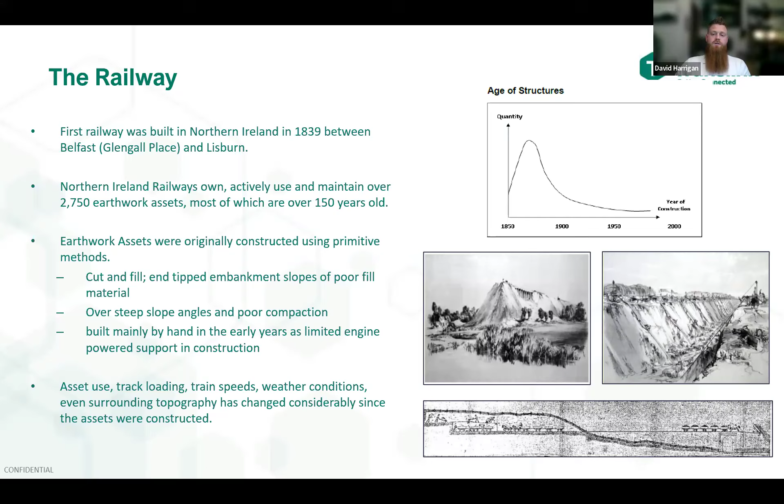Asset use, track loading, train speeds, and weather conditions have all changed since the original earthwork assets were constructed. Excavation of slope toes has taken place to realign track, reduce curve radius, or install new signalling equipment. Embankments have been raised to improve rail condition, and construction works by third parties at the crest of cuttings and toes of embankments has all contributed to changes in the earthwork asset base.

Northern Ireland Railways define an earthwork as an embankment or cutting with a level difference from crest to toe of greater than 3 metres. Northern Ireland Railways are the second largest earthwork asset owner in Northern Ireland, behind DFI roads, and we are responsible for 171 miles of earthworks. Approximately 40% of the Northern Ireland Railways network runs on or in an earthwork asset.

There are 2,751 individual earthwork assets within the company's earthworks portfolio, and you can see in the slide a breakdown of the asset types we maintain on the network. We have approximately 90 rock cuttings, and the remainder of our assets are spread pretty evenly between soil cuttings and embankments. Asset types within the portfolio varies.

We have large natural soil slopes, like those at Cloghan Point, large man-made soil cuttings in Craigmore Cutting, which leads onto the Craigmore Viaduct at Newry. We have low floating embankments over peat bogs at Adavoyle, natural rock slopes at Downhill, as shown in the image, and man-made rock cuttings within Wellington Cutting, right down near the border.

Northern Ireland Railways as a company must deliver a high-performing, safe and reliable public transport system, and we have to do this sustainably. Translink must ensure the safety of passengers and services at the lowest whole life cost and reduce the impact of extreme weather on railway infrastructure.

The management of earthwork assets in the railway environment presents unique challenges. Track access is limited due to the operational timetable, and it requires significant planning to view and examine assets. Our network assets cannot be easily and economically replaced, and the age of the assets and limitations of the railway corridor has a significant effect when applying current design codes. There are also uncertainties associated with variable construction materials and methodology used in the construction of the historic embankments.

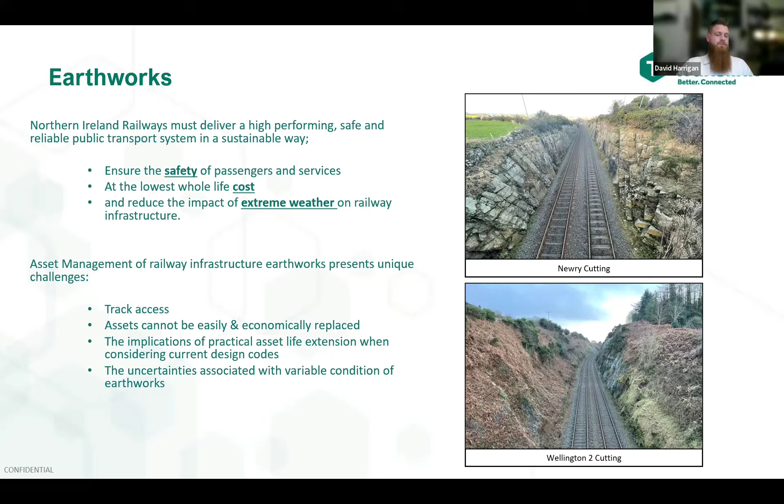Northern Ireland Railways' annual budget is funded by revenue for maintenance works and capital investment for improvement schemes. Annually, earthworks and drainage spend in the region of £2 million carrying out maintenance works and examinations. Our annual capital expenditure is generally in the region of £5 to £10 million, and listed below is a few of the earthworks and drainage projects we are undertaking at the moment.

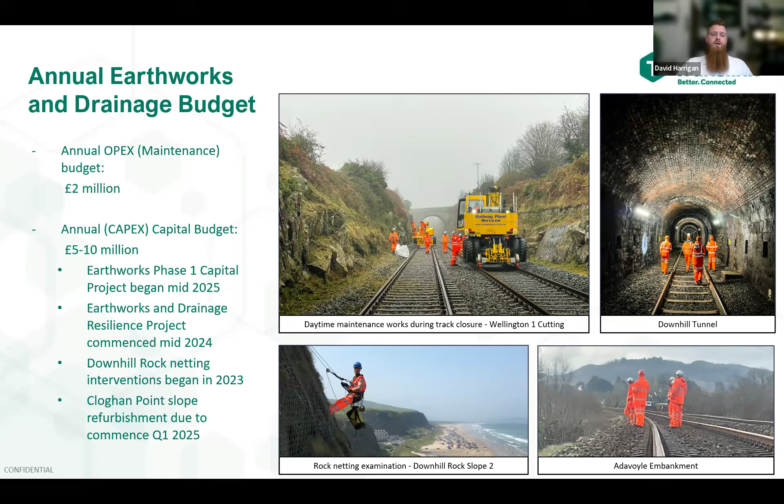This list includes the Earthworks and Drainage Resilience project, which you will hear me refer to a lot when I move on to the next few slides, as the core deliverable of this project is to locate, map and condition assess all the drainage assets on the entire railway network.

Historically, within the railway environment, drainage assets have been considered a secondary or child asset, there to support the function of the main assets such as earthworks and track. On the Northern Ireland Railways network, just like other major rail operators in the UK, the drainage systems have been historically underfunded, with maintenance and improvements being carried out as a reactionary measure to address flooding incidents, with limited proactive investment. Interventions, when carried out, have historically focused on the failed asset without consideration for the wider drainage system.

Recent incidents on rail networks in the UK and Europe have prompted a shift in philosophy to consider drainage assets as a primary asset. As mentioned, we are currently undertaking a project called the Earthworks and Drainage Resilience Project. This project is primarily focused on the collection of drainage data across the entire network. The project commenced in mid 2024, and the main focus of the project is to locate, georeference, and examine the current condition of all drainage assets affecting the Northern Ireland Railways network.

To facilitate this, we have developed a bespoke drainage app and upgraded our existing Earthworks database to store and retain drainage asset data alongside our existing Earthworks data. Development of the drainage database adjacent to the Earthworks database is in line with Sir Lord Mair's recommendations following the Carmont incident, and we are one of the first rail operators in the UK to hold this data within one database. The relationship between earthwork assets and drainage assets is considered fundamental to the success of the project.

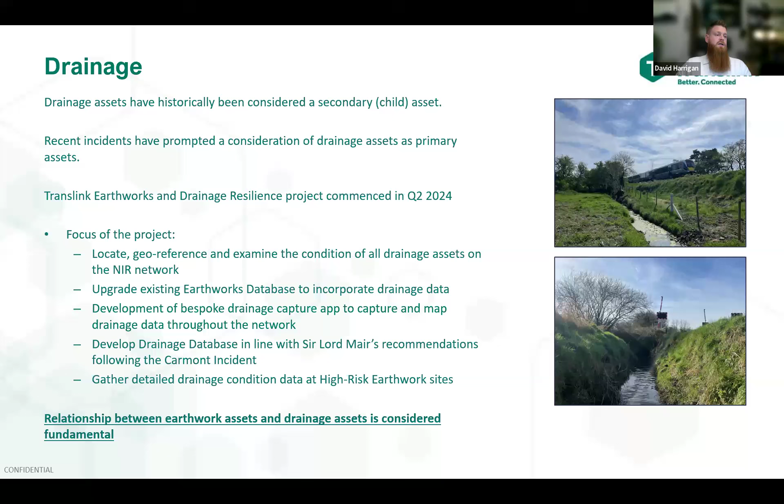To date, updates to the Earthworks and Drainage database and data collection systems have been completed, and we now have a fully functioning Earthworks app, Drainage app, and integrated Earthworks and Drainage database. Aerial LiDAR surveys of the entire network have recently been carried out and incorporated into the database. We have utilised this to identify previously unknown earthworks assets and will be examining these during the upcoming earthworks examination season. We have currently covered approximately 22% of the network and identified over 7,000 drainage assets.

This is increasing daily as we have 2 teams out gathering off-track data every day and 2 teams out gathering on-track data every night. A drainage maintenance plan and schedule has been produced based on the information to date, and we have already begun to carry out proactive maintenance activities on poor condition drainage assets in high-risk areas of the network. We are also working to develop drainage renewal and refurbishment plans.

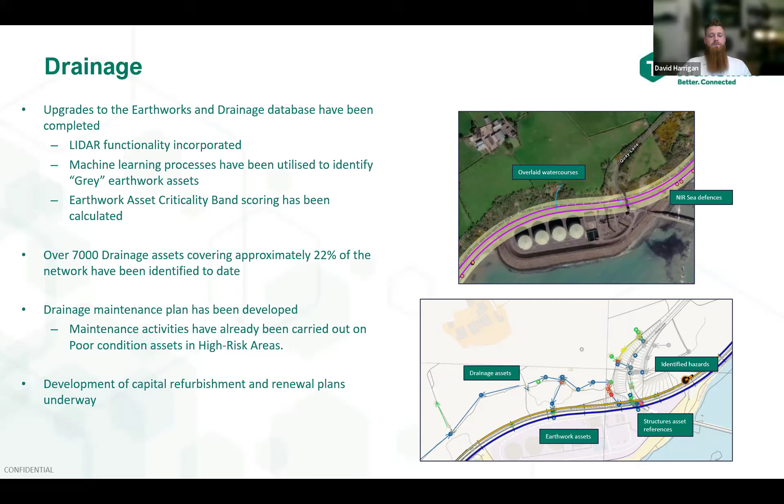on the earthwork assets. Amey Consultant provide trained earthwork examiners, and Adman Construction provide track safety teams, rail-mounted plant, rope access operatives, and railway qualified personnel to facilitate track access for examinations and to carry out earthworks maintenance activities. We generally have an earthwork maintenance team on track every night from October to February, and our earthworks examinations are carried out during the low vegetation season between November and February.

For the duration of the ongoing Earthworks and Drainage Resilience project, these teams operate under a project manager in our renewals department, but these teams will migrate to the Earthworks and Drainage team following the conclusion of the project.

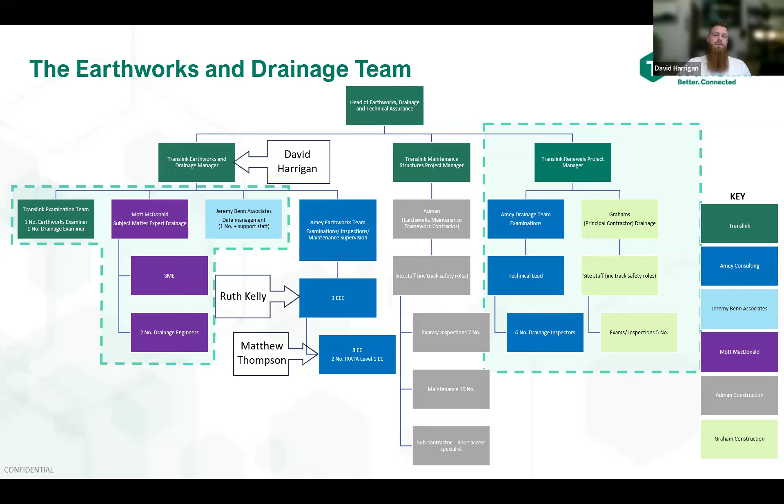Translink have competency requirements for members of the Earthworks and Drainage teams who examine our assets. These competencies are based on Northern Ireland Railways Competency Management Framework and current industrial standards. We review the competency of all examiners annually, and our mentoring scheme is utilised to maintain examiner competency.

An example of the competency required for an earthwork examiner qualified to examine a rock slope asset is shown on the slide. The requirements for examining rock slopes includes attendance at a week-long rock slope hazard index course in Scotland. Some of our earthworks examiners also hold IRATA rope access certification to facilitate examination of rock slopes while suspended on ropes. I'll now hand over to Matthew, who will talk through the earthworks examination process.

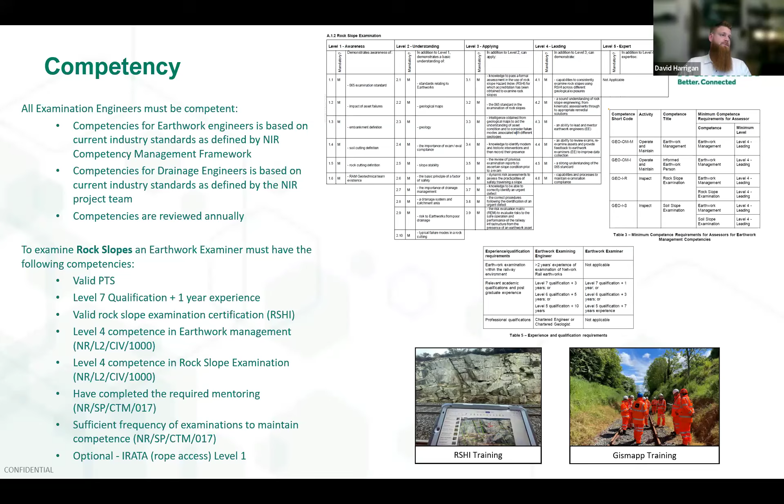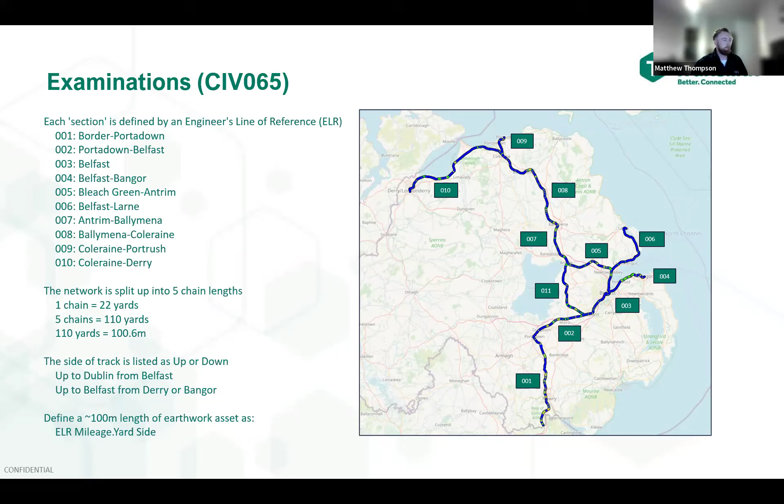Cheers, David. So just before we touch on the examination process, let me explain how we reference the assets uniquely across the network. The NI railway is split up into 11 sections, and each section has its own unique engineer's line of reference from 1 to 11. Within each line, it's broken down into miles, half miles, quarter miles. But for our assets, each earthwork is broken down into a 5 chain length, which is approximately 110 yards, and also the side of the earthwork, either up or down.

So we carry out our examinations in line with CIV 65, and this standard provided by Network Rail sets out the data required to complete an earthwork examination, and also provides the algorithm to calculate the risk that earthwork poses to the railway. We complete our exams digitally through an app called Gismapp, created by JBA.

So the first step of an examination is to identify the type of the asset - that can be a soil cutting, embankment, or rock slope. Typically it takes 10 to 15 minutes to complete an examination, and these are usually carried out from track level.

So the first exam we'll have a look at is the soil cutting, and these are probably the most straightforward to carry out, as you have good visibility from track level of most of the features of the earthwork. Initially you'd be looking to capture the max height of the earthwork, the gradient of the slope, whether there's change in gradient from crest to toe as you move down the slope, and other major things you're going to capture - existing remediation measures such as soil nailing or toe retention.

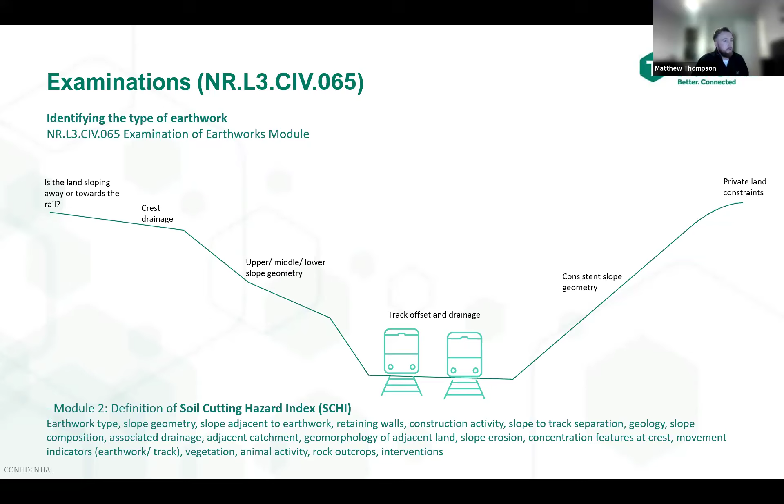Also the track offset from the toe of the earthwork. What's also important is to note any sort of movement indicators, either historic or more recent, such as toe slumping or slope erosion.

Some of the issues we have in carrying out exams in soil cuttings particularly is the exam requires input of the wider catchment area, and if it slopes away or towards your asset, and this can obviously be difficult to see from track level, so it's best to get a feel for the lay of the land before you're within the cutting.

There's also the issue of heavy vegetation on the slopes, which can obscure them, and the examiner has to make the decision - can they see enough of the slope to assess the risk appropriately, or do they require to leave the exam unfinished and come back at a later date once devegetation has occurred. There's also the option to complete the exam with it left heavily vegetated if the examiner feels that it's a low risk asset. And just some other examples of the sort of features we would pick up.

You can see there, if the examiner felt they did need to go off track to view the asset better, there still might be restrictions around actually gaining access to crest level just with security fencing.

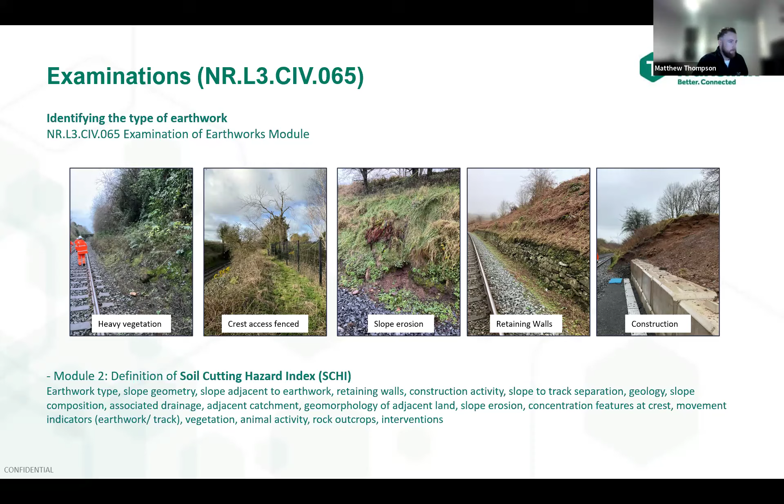And across the network, there's a number of different types of retaining walls. Here's more of a historic rubble wall, which you usually typically find around the Newry cut, and then a more modern modular block wall. And that example of the modular block, during exam, we would capture that as a construction activity as it's still ongoing.

And ideally, you'd want to come back at a later date when the works have been completed to capture the as-built version of the earthwork.

Now if we're going to look at the embankment exam, it's quite similar to the cutting in the sense of what you're required to capture to assess the risk. But some of the things that are more tricky with embankment is, as you're typically at track level, you can overestimate the gradient and the height of the earthwork, just given your perspective.

There's also requirement to capture any drainage, and most of the sub drainage is signposted around the network, but it's one thing knowing it's there, but getting actual eyes on it to assess the condition is another thing.

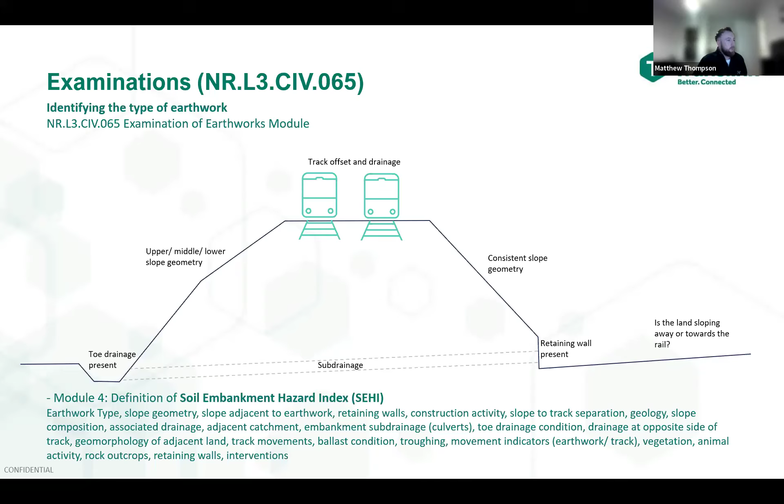And again, as with the cuttings, you look at recording any movement indicators such as ballast loss down the slope, or even - a lot of the embankments are constructed over, not a lot, but some of the more high risk embankments are constructed over bogs. So you do have an issue with long-term settlement, and on occasion you can see dips in the track, particularly around culverts.

Just again, some features that we come across when trying to carry out an embankment exam. You can have flooding at the toe, which then obviously obscures you picking up the height of the slope and the toe geometry, and difficult to assess is that flooding caused by field drainage or no drainage existing. So ideally we'd like to come back to them assets at the dry season to get a feel for what the toe condition is.

There's also a lot of the embankments have oversteepened slopes, which obviously poses a risk to the track, but also if the examiner does feel they would like the slope devegetated prior to completing their exam, it does make that more complicated with the maintenance contractor having to make use of rope access specialists to clear a swathe for the examiner to get a feel for the slope geometry.

And then just an example of where we have embankments adjacent to water courses, there's obviously the toe scour risk, and again the examiner can't really assess the toe condition of the slope.

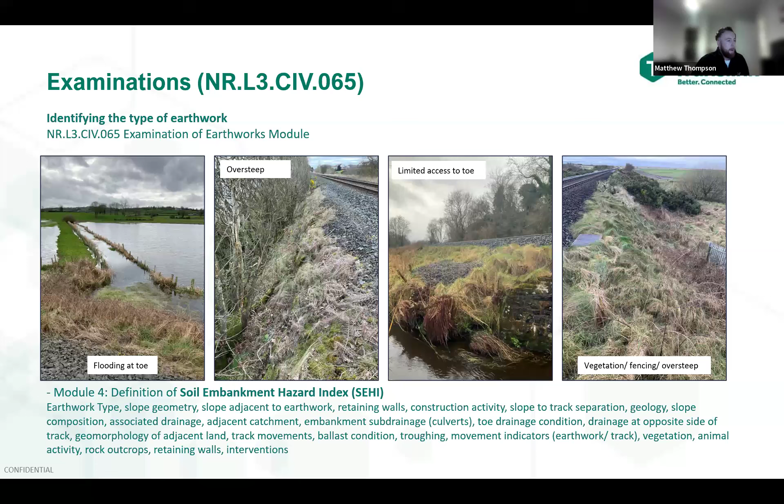So the next thing is the rock slope examinations. They're quite different from your soil assets, and as David said, you need to do a training course to properly understand what you're required to capture.

The main thing is you're looking at the rock mass characteristics. You're looking first to capture your joint sets, your bedding planes, and the spacing between these, along with the compass direction of the slope face.

The software can take this data and make an estimation of the types of potential failures that could occur. But alongside that, you also enter what your opinion is and what any potential failures you can see, be they planar, toppling, wedge, or ravelling failures.

Alongside that, you would also capture any groundwater flow through the rock face, and in some cases there may be a soil cut above the rock face, and the examiner would have to make the decision: do they feel that needs a separate examination if they feel it poses a risk standalone?

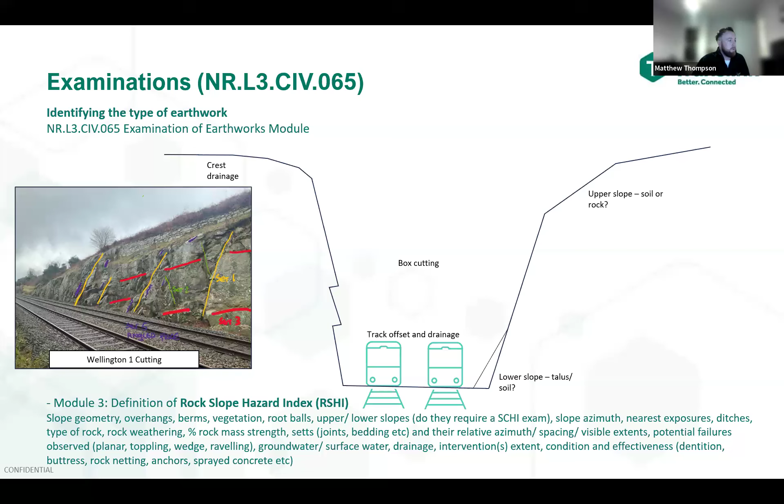And then across the network, a lot of the rock assets do have existing remediation, such as your dentitions, shotcrete, buttress, but the most common is the rock netting systems.

A lot of these have been installed historically, and the information on their design and their as-built condition isn't really there. The examiner is asked to make an assessment of the effectiveness of the existing remediation, which can be quite difficult when you're not 100% sure on the crest anchor depth or condition.

But I'll be going out next week to inspect a rock netting system on ropes that maybe hasn't been looked at for 10, 15 years. So that'll be a good opportunity to see how they're holding up.

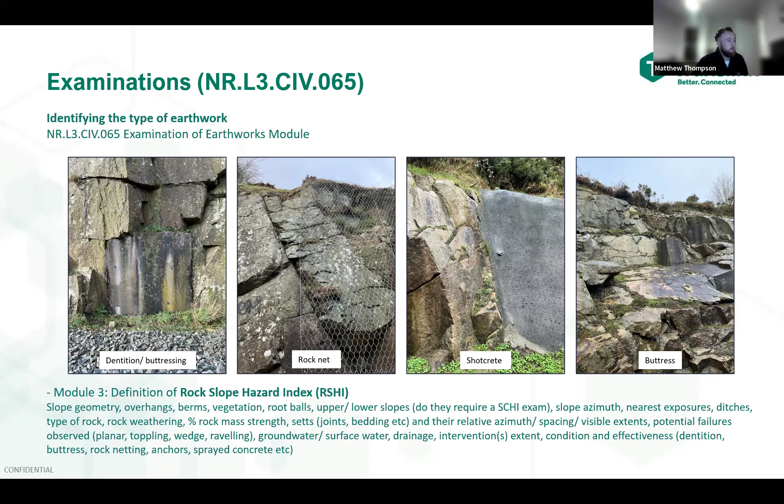So alongside the required information to complete an exam, the examiner also records what's known as a risk evaluation matrix. This sits outside the exam process and allows the examiner to give an opinion, either low, average, or high risk, on different potential failure mechanisms.

So you might have, for an embankment, the risk of a translational slip, or is there any detrimental vegetation, or the scour risk, just to give a second opinion, although the geometry and everything else you're capturing does give a good feel for risk.

It doesn't capture everything. There's also room for the examiner to just make general comment on the site condition, and also make recommendations for maybe things that don't directly affect the earthwork asset, but affect the overall safety of the railway, such as any structure defects you might see, or animal activity or blocked drainage, that can be flagged and passed to the relevant parties.

And also just generally for the next examiner coming behind you, any hazards that should be noted.

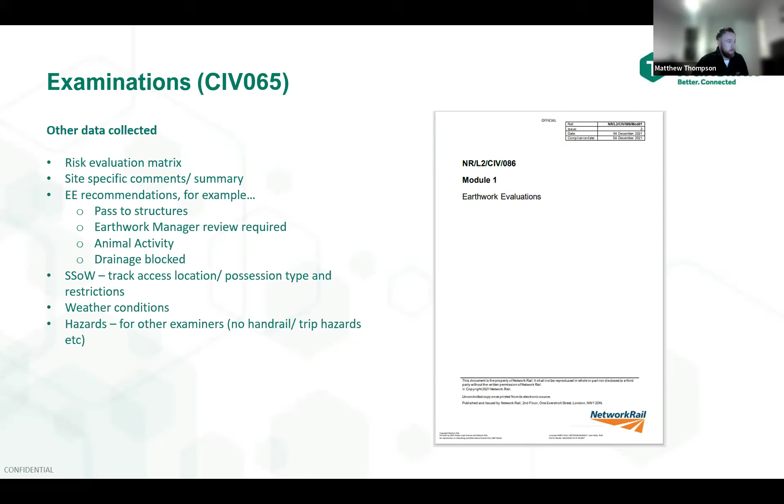So once you complete your exam, the system categorizes that asset within an earthwork hazard category, known as EHC, and that ranges from A to E, with A being the lowest likelihood of a failure and E the highest. This directly determines the frequency of that asset for further examinations.

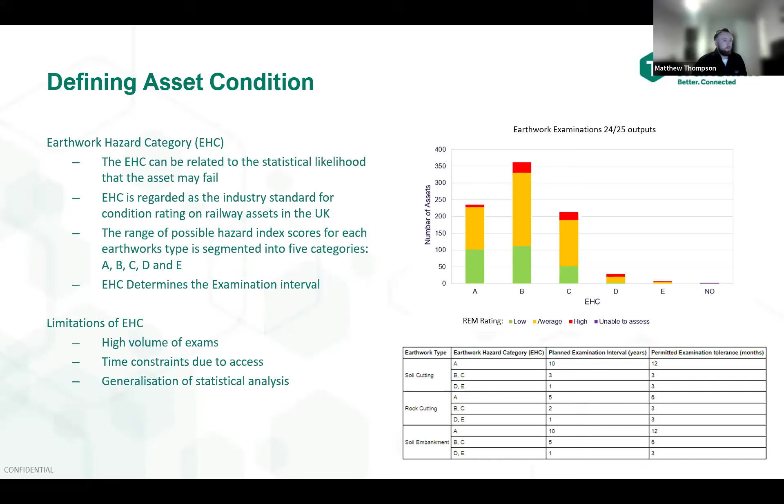So overall, there's three major classifications of the risk: your EHC which we spoke about, the risk evaluation matrix, which is the examiner's subjective opinion of the risk, and the overall earthwork asset criticality banding, which looks at the bigger picture — if a failure was to occur, how many lines it would affect the wider infrastructure, and that's something that Translink are working on currently to get a feel for the overall risk of failure.

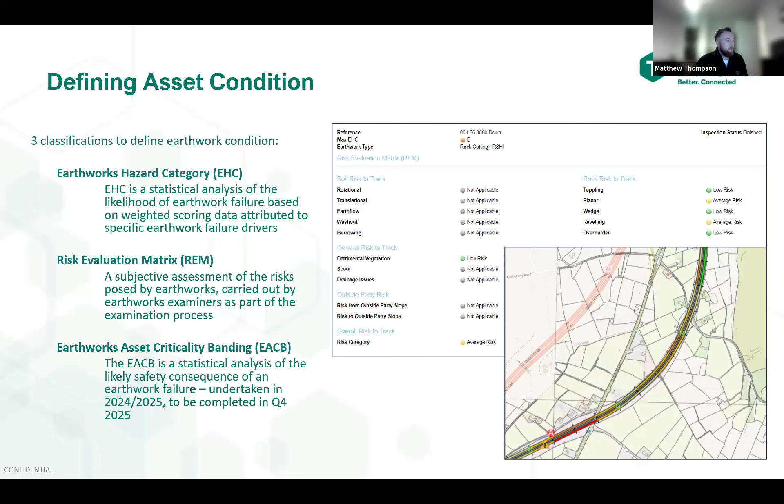So just looking at an overview of the assets we examine, there's nearly 3,000 in total, with the majority being embankments. But out of all of them, only 6 currently have an EHC score of E, the highest risk category. But out of those 6 classified as E, only 1 was considered high risk under the risk evaluation matrix system.

Whereas you can see EHC C, which would be considered your medium risk sites — 54 of them, subjectively, the examiner thought there was a high risk element to that asset. So you can't just solely rely on the EHC to predict failure or examination frequency. It needs to be looked at as a bigger picture.

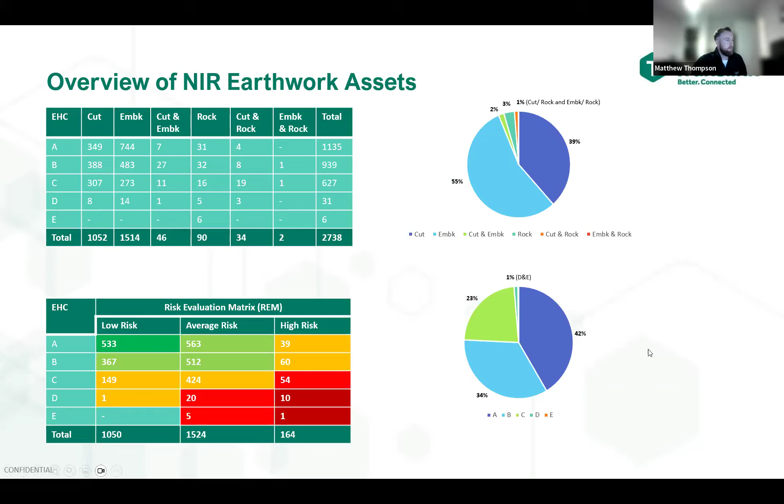Okay, so Matthew's talked through the exams, and I also undertake exam approvals. These are all carried out in accordance with Civ 65. There's about 800 exams on average carried out annually during the winter months, due to vegetation dieback. And as Matthew mentioned, the examiners carry out about 8 to 10 a day on average between running trains. It's all done on day shift, and where there are disruptive closures, we try to make use of the examiners on these to make progress.

Every year there's a small percentage of incomplete examinations. Some aren't approved, some will require further vegetation clearance and weren't able to be vegetated during the season. They're too obscured for the examiners, or they're inaccessible. A few have also been due to just issues with the software and on the network.

I also refer to some of the outputs as generic admin outputs - assets that are going to be removed, which are less than 3 meters in height and are low risk. Assets added to the register that weren't previously captured, and David mentioned the LiDAR picking up some of these areas for this year, or amendments to asset types that have been previously recorded. We also have recommendations made by the EEs outside of that risk evaluation matrix. They also have independent commentary that they put in on each asset, and some of those form part of the earthwork maintenance schedule. There's a few ways that maintenance schedule is built up, which we'll touch on.

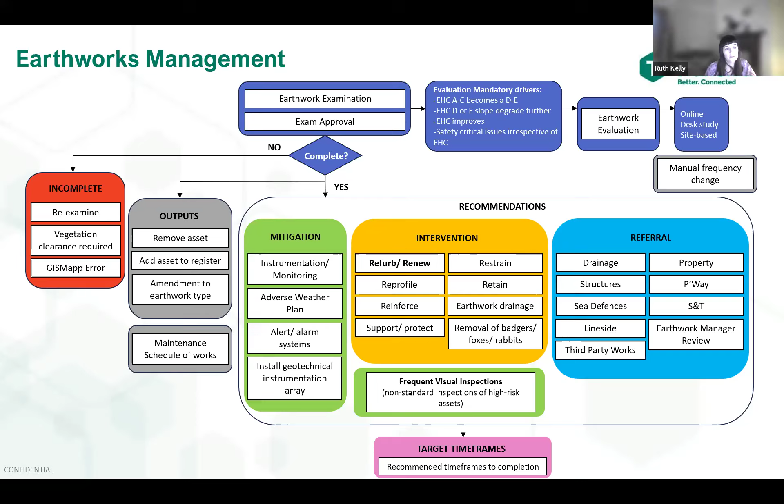So the recommendations this year came with target timeframes to enable the client, Translink, to plan budget requirements for proposed maintenance or capital works upcoming. As well as this, Amey also provide emergency on-call consultancy to Translink, which includes earthwork incident support in accordance with CIV 185. So hopefully that paints a picture.

I know it's a bold slide, but it paints a picture of where I'm going with the rest of this presentation. I'm going to cover some of the interim mitigation measures, and then I'll touch on some of the intervention works that we've been involved in with Translink over the last few years. In particular, I'll touch on maintenance, some emergency works, and some refurb renew.

So I mentioned the inspections, visual inspections. Prior to Amey joining the maintenance contract, these were paper-based records with local changes on the ground, all on a 2-month frequency. Following the first few rounds of inspection, we digitised all the records. We worked with Translink and JBA to develop a tab within GISMapp so that we could georeference all the photos and the records. And what was important was maintaining the same staff on each section of track to allow them to visually inspect change and to gain familiarity with the assets.

So we've since recommended alternative frequencies for assets based on findings, and we continue to review the frequency. We add and remove items from the scope where required on agreement with the earthwork manager. The high risk assets are on a 2, 4, 6, 12-month visual inspection, and it's important they sit outside of CIV 65 exam frequency. You'll see me mention one of the renewals at Gora. It previously was on the list, and since it has been upgraded, or there's been a renewal and remediation installed, that'll come off the visual inspection list.

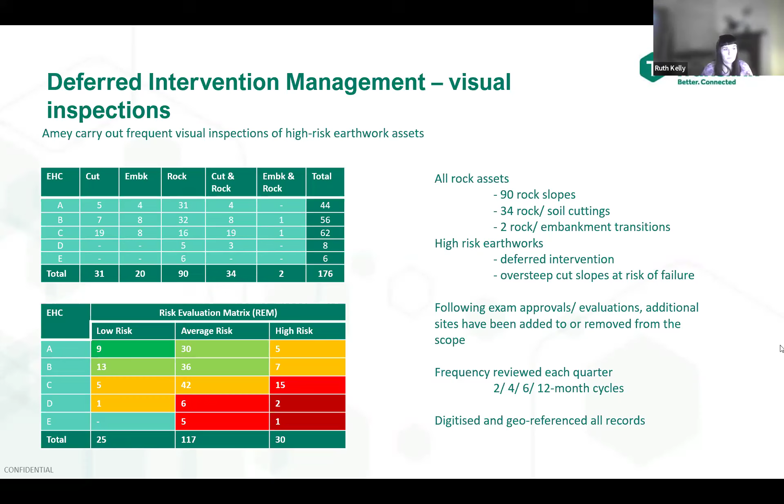But we have worked with Translink to build up, every 12 months, we will go visit all of these sites just to build that maintenance schedule. So any debris that needs released from the rock netting, any patch repairs required, any devegetation required, these are built in to the end of the visual inspection schedule each year.

So Translink also have an adverse weather risk management plan. There's been 11 named storms back in winter 23-24. Translink had significant issues on the network, especially for that earthwork asset portfolio, following Storm Ciarán in particular in October 23. We have been involved in 10 emergency earthwork interventions since October 23, and Translink themselves have an adverse weather plan which covers their vulnerable sites for earthworks.

They focus on assets that would be at risk of inundation of surface water, assets that would be vulnerable to scour. You'll see one in the emergency response slide. And this plan is constantly reviewed and updated, and we recommended a number of sites following last year's seasons for addition to the plan this year.

In advance of storms, Translink put out speed restrictions where required. They also have a series of on-call teams, their own internal structural engineers, on-call consultants including ourselves, on-call contractors, and they also have additional track safety squads and plant that they would distribute around the network to be placed on standby. In the past few years, we have had redirection of our own EEs on the network to carry out forensic analysis of any failures, advise short-term temporary measures, and work with the earthwork maintenance contractors to install these short-term measures just to facilitate reopening the route in a safe way, minimizing disruption. It's all about providing safe travel for the end users.

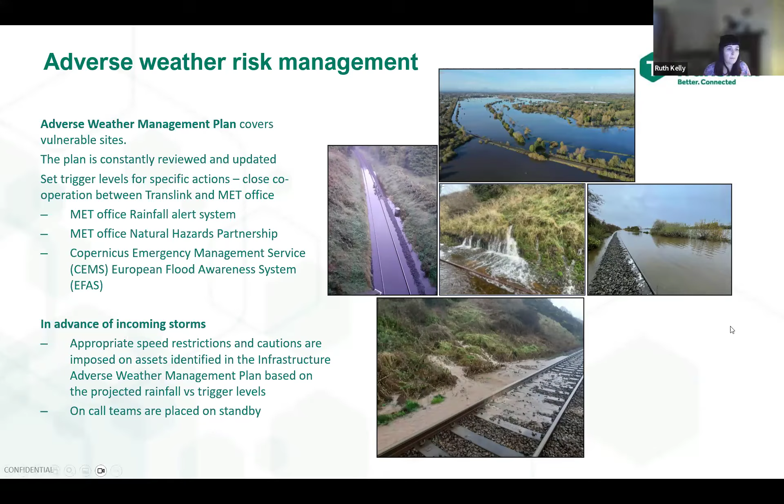So Mullahead on the left there, that was an embankment which was prone to toe erosion and was already being monitored by the client. In late 23, though, due to high water levels and fast flow in the Cusher River at the toe, it experienced accelerated scouring. So ridgeway rock bags were installed to protect the toe from further erosion, maintaining that river channel profile as well. Poyntzpass in the middle is a site which hosted a major badger sett, and the large spoil debris slipped towards track.

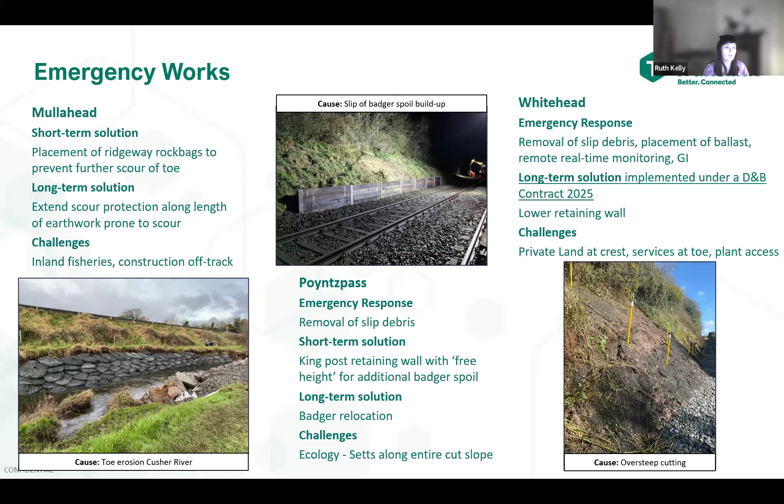Scarva was another oversteep cutting which failed during November 23. We had a temporary remediation of the slip area undertaken, and another monitor and alert system installed in between, until the full intervention was installed with soil nails in 2024.

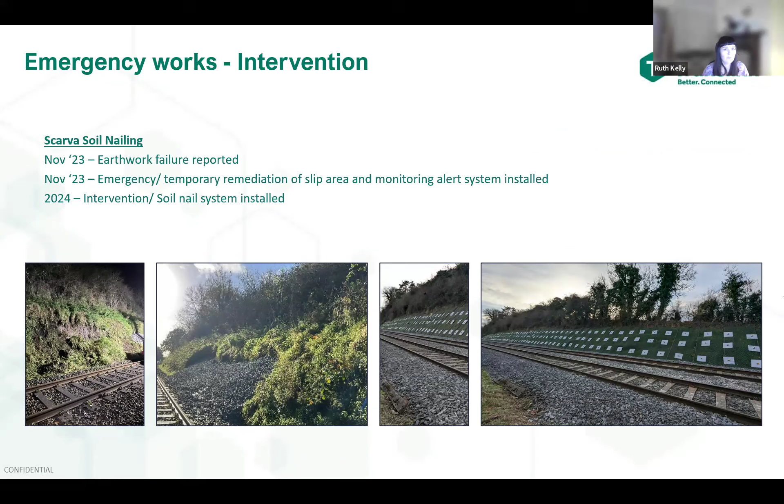Moving on to maintenance - David mentioned earlier that regular maintenance is carried out annually. There's a full-time night shift earthwork squad from September through February each year, and we've moved towards a targeted maintenance program on a 3-year cycle, which has been a great benefit.

Some of the typical tasks are outlined on the slides - I won't go through all of them. Matthew mentioned the rock net inspections. Some of the guys are out at the minute devegetating the netting within Wellington 2, and we'll have our EEs going out to inspect that next week.

We also agreed methodology under maintenance for in situ investigation of soil cover, to aid in that rock slope/soil slope asset identification. You see a lot of the upper soil slope coming down, covering the lower rock outcrop, which is difficult to identify without doing this.

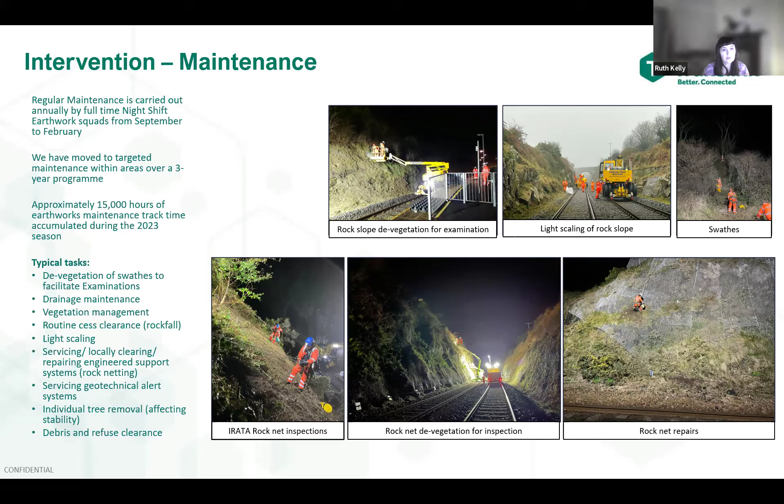Approximately 15,000 hours of earthworks maintenance track time was accumulated during the 23 season. But maintenance comes with a multitude of constraints: the planning, the length of possessions, access with the required plant, protecting the track during scaling, and debris removal activities. The track always has to be handed back in the morning, so all tasks need to be planned to ensure this within the constrained possession times.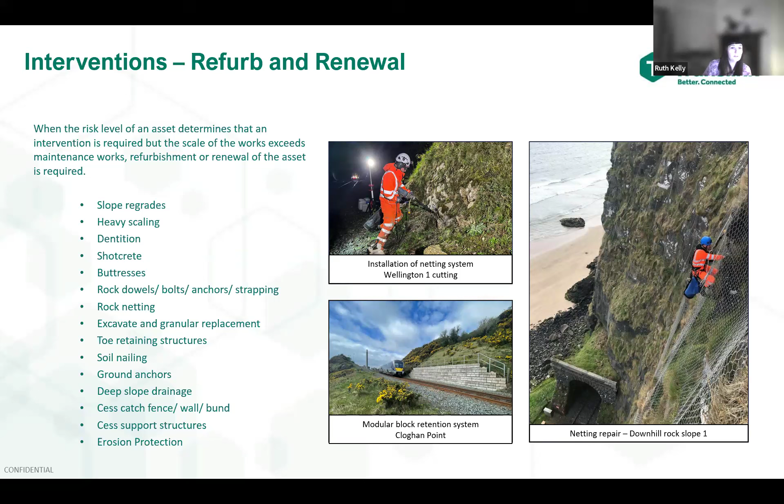As noted previously, when referring to refurbishment or renewals, it really is just the difference in scale of the works. There's a few examples of the types here: retention, regrades, protection, reinforcement. I'll quickly talk through a few of the recent interventions we've been involved in before handing back to David.

Downhill, following rockfall in 2002, there were 4 rock net systems installed here. Everyone knows the scene.

There were inspections of all 4 netting systems carried out between 22 and 23, and we were then involved in the emergency repairs of components during 2024. The systems are in a very exposed environment, and the condition of the netting has been deteriorating, so we've now commenced feasibility and outline design for the replacement of these netting systems.

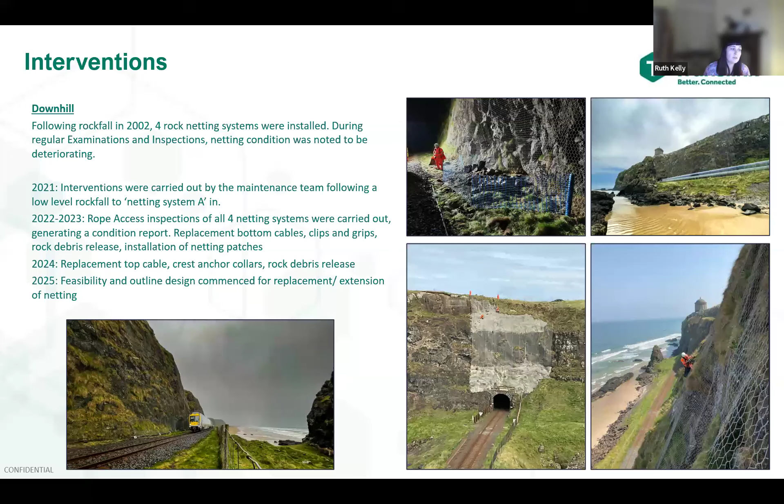Finally, a draped rock net system was installed in 2023 in Wellington 1 cutting, and we put in formalisation of the crest and downslope drainage somewhere in the midpoint of that netting system.

More recently, Goragh was another draped rock net system installed this year. This netting system, however, also incorporated erosion protection matting in areas of significant soil cover.

So I'm going to pass back over to David here now, who's going to talk through how Translink have been embracing technology, and how data collated on permanent earthwork attributes will benefit our earthwork examiners on the ground going forward.

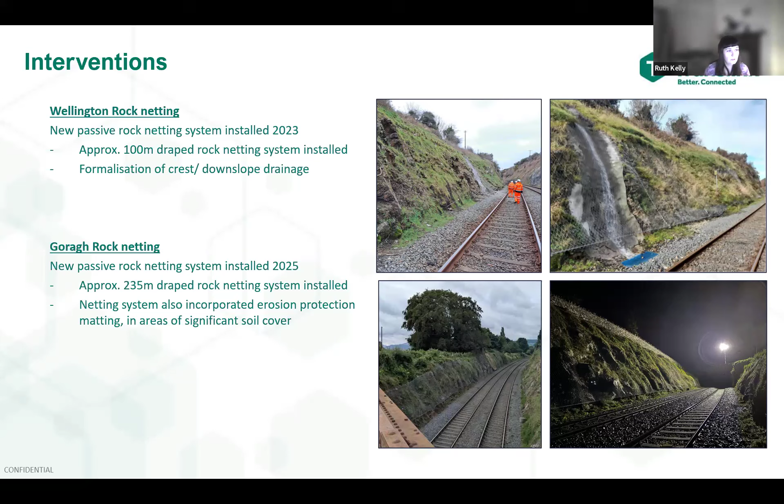Thanks, Ruth. As you mentioned, there's been a recent push within the railway industry to adopt suitable technologies to reduce the amount of boots on ballast. Earthworks and drainage assets have been no exception to this.

As previously mentioned, LiDAR has been incorporated into the Earthworks and Drainage database, and machine learning processes have been utilised to identify unknown earthwork assets throughout the network.

We've also captured a number of our rock slope assets using 3D point cloud surveys to monitor the change in condition over time, and we're exploring the use of satellite monitoring InSAR to monitor a number of our high-risk soil slopes. Remote failure detection systems have been installed on 3 high-risk cuttings throughout the network.

We have plans to expand this coverage. The video at the bottom right shows an alert that we received following a temporary repair, which was installed as a rapid reaction during a night shift.

The monitoring system was installed, but over the course of the next couple of days, we noticed movement. We were alerted to this following heavy rainfall, and we were able to get back out there and improve that repair before the renewal works was done on that asset.

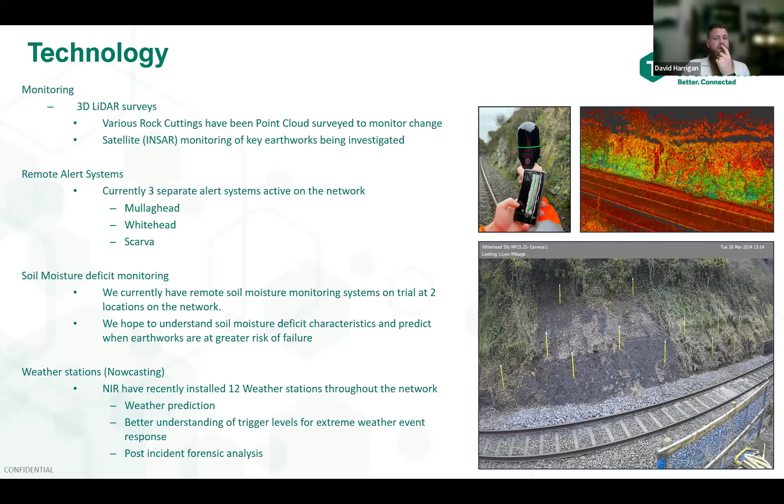Further development of our database is also planned. We're currently incorporating earthworks and drainage data within the Translink corporate GIS system to ensure that data is available to the wider business, and all contractors operating on our network have access to it. In the last few weeks, we've incorporated geological mapping within the earthworks and drainage database, and are in the final stages of incorporating a new global stability and resilience tool.

The GSRA assessment tool examines the theoretical rotational and translational failure mechanisms for every soil earthwork on the network and provides us with a better risk categorization for earthwork assets. This will be over and above the EHC, REM, and EACB that Matthew went through that we capture.

I've mentioned LiDAR a lot. We're also using it to find drainage channels and concentration features that may exist in areas of the network we can't access or find due to vegetation and access restrictions. We've completed one pass of the network so far, and we're working on calibration of the machine learning tools to further expand on this process.

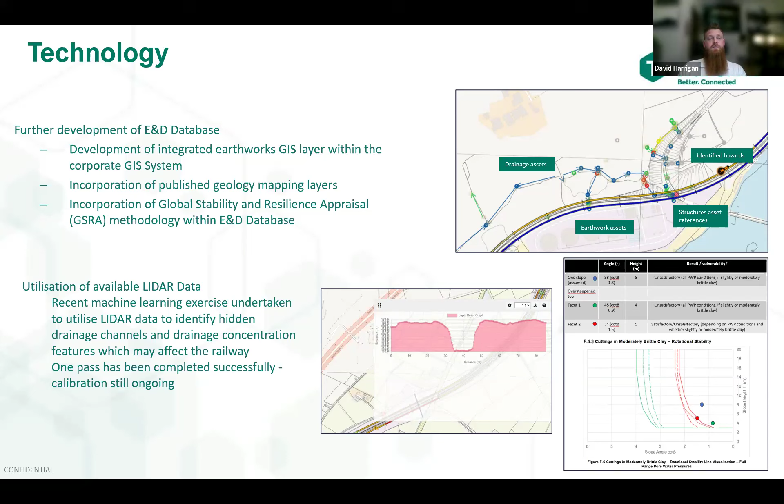As we move forward, we have significant earthwork interventions planned to improve safety in the network. Earthwork strengthening phase 1 is underway with a focus on rock slope remediation. As Ruth covered, the first site in Goragh Wood is now complete, and a second site is due to commence shortly. The Earthworks and Drainage Asset Life Extension project is due to commence in a few weeks, carrying out small-scale refurbishment works on numerous earthworks and drainage assets throughout the network.

Earthwork strengthening phase 2 is in the final stages of planning and due to commence in 2026. This project will focus on the renewal of numerous high-risk soil slopes throughout the network.

One of the key areas for the future is climate adaptation. We're using weather stations throughout the network for better forecasting, gathering knowledge of our drainage systems, and expanding our remote earthwork and soil moisture monitoring systems. We are also engaging and taking forward recommendations from the Achilles project, a UK-wide academic study on the long-term deterioration of linear geotechnical assets, studying the deterioration process, asset performance, and deterioration forecasting, incorporating climate change within that.

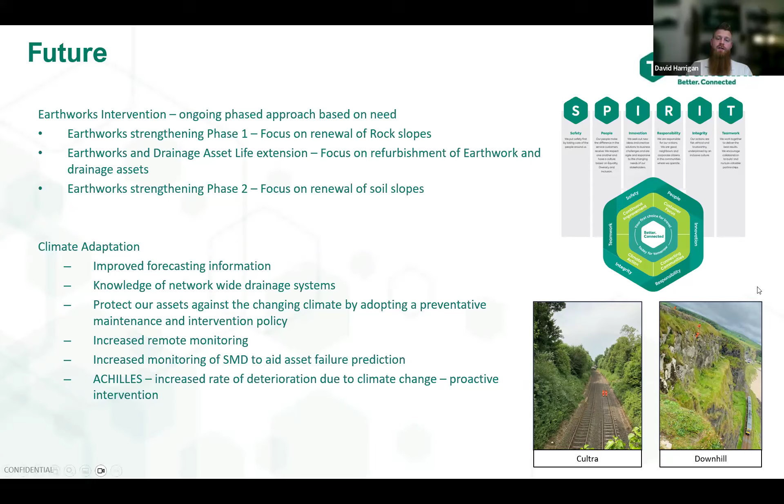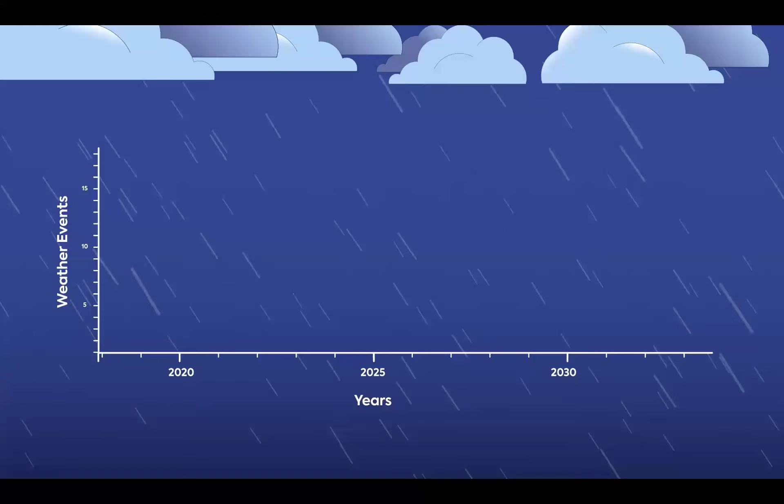The climate crisis is real, and we're already feeling the impact. Heavy rain, flooding, rising sea levels, extreme temperatures, storms. These weather events are becoming more frequent and more intense, and they don't just disrupt daily life, they put vital transport services at risk. That's why Translink is taking action. We're leading the way in transforming transport across Northern Ireland, strengthening our infrastructure to handle these challenges, keeping journeys safe and reliable, and making sure you're always connected to what matters most.

To achieve this, Translink are doing two key things. First, building resilience, getting ready for extreme weather and recovering quickly when it hits. Second, adapting, changing how we work to protect the network for the future. You might not see these changes, but they're happening all around you. Along railway lines, we're removing trees at higher risk from storm damage to keep passengers and staff safe, while replanting in better locations to support biodiversity.

Across the network, we're upgrading drainage systems, bridges, buildings, and sea defences to tackle flooding. And we're addressing the challenge of rising temperatures with remote temperature monitoring and mitigations in real time.

The call for action is clear. Climate commitments, legislation, and the need for change are shaping the future of transport. Translink is already making a difference, and we're not slowing down. Public transport is the backbone of our economy, communities, and daily lives. But we need focused, sustained investment to reinforce our infrastructure and Translink services. Translink is working with government and industry to build a stronger, more sustainable transport network, keeping Northern Ireland moving and better connected today for tomorrow.